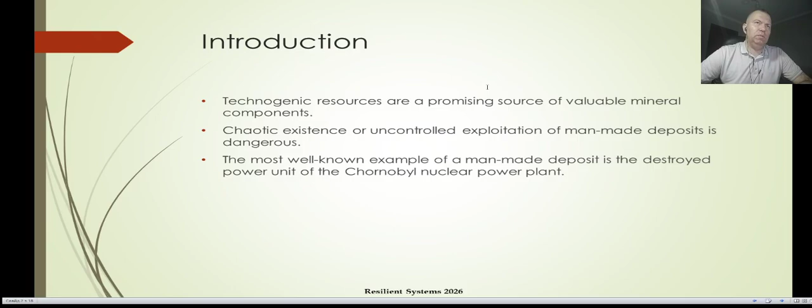At the same time, uncontrolled exploitation of man-made deposits and their chaotic existence turn industrial landfills into potential sources of environmental pollution due to the filtration of aggressive toxic substances into underlying rocks and mixing with groundwater. A well-known example of a site that can be considered a man-made deposit is the destroyed power unit of Chornobyl NPP. The most acceptable method of extracting the useful component is its infiltration leaching.

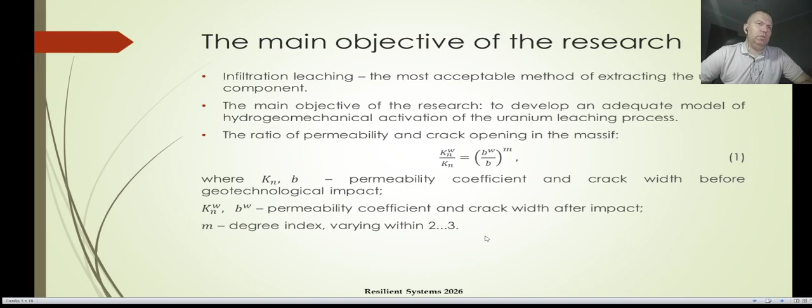The main objective of research is to develop an adequate mathematical model of hydrogeomechanical activation of the leaching process, allowing to optimize the reagent costs by choosing rational parameters of its infiltration, flow rate, and concentration. The main idea for the activation of physicochemical processes during leaching is based on the following ratio of permeability and crack opening in the massif. The next slide shows this relation in a graphical form, where there is a sharp quantitative jump between the parameters of permeability and crack widths.

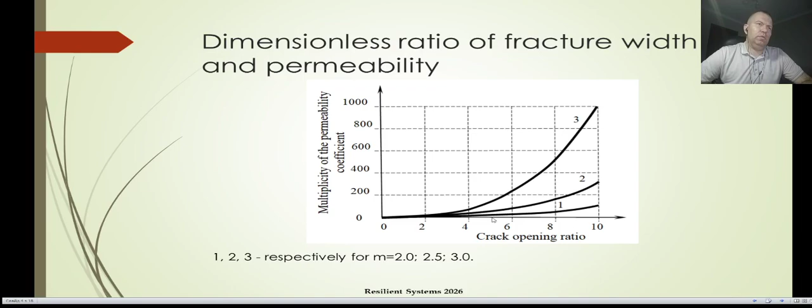One of the effective ways to combat the negative impacts of industrial waste accumulation on the environment is the construction of various types of protective anti-filtration structures. Our proposal is to create a protective anti-filtration collector complex AFC that provides protection of the subsoil from the penetration of toxic substances, collection and delivery to the surface for processing and disposal of liquid technogenic waste.

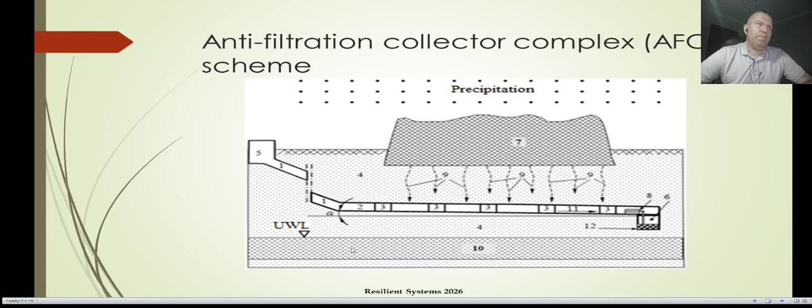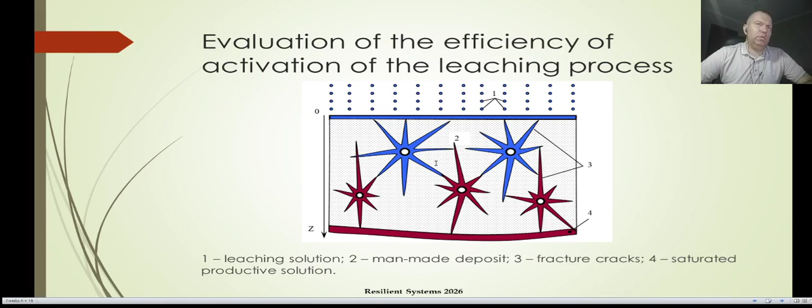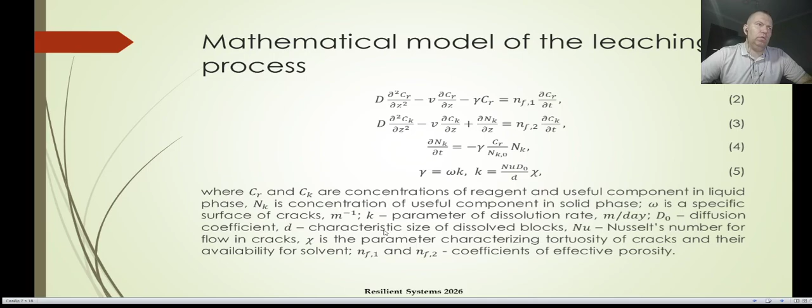The efficiency of hydrogeomechanical activation of the process of leaching was assessed by modeling one-dimensional vertical non-stationary migration of a two-component mixture leach solution and useful component, where 1 is leaching solution, 3 fracture cracks, 4 saturated productive solution. The mathematical model of the leaching process is a system of mass transfer equations 2-5 under the condition of non-equilibrium kinetics. This equation reflects the pattern of decreasing leaching rate in the technogenic massive in the vicinity of the crack surface. The experimentally confirmed dependence of the increase in mass transfer intensity on the filtration rate is taken into account. The initial and boundary conditions for the system 2-5 are formulated in the following form 6-9.

These conditions correspond to the equality of convective flows and insignificant diffusion of these substances flowing from the fractured rocks into the underlying deposits, which is acceptable at a high filtration rate. The system of equations 2-9 was solved by the finite difference method using the stable implicit scheme with the developed calculation program. The created software was developed with the .NET 8 framework and WPF that provides a simple user-friendly interface.

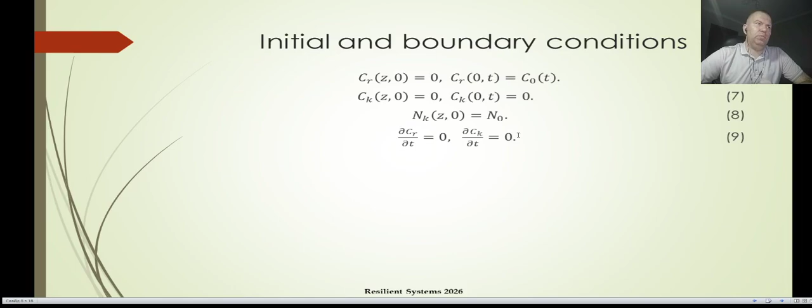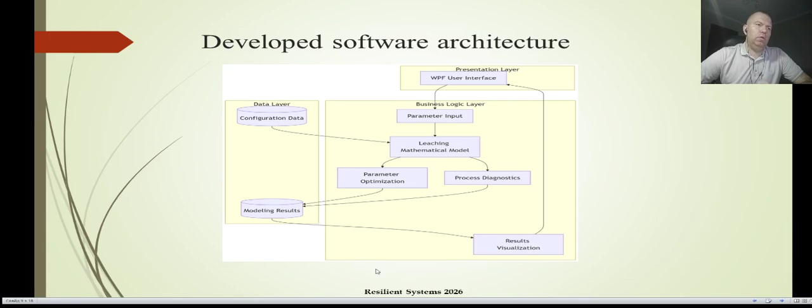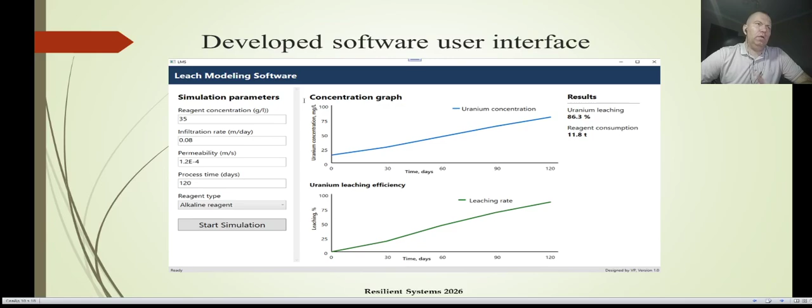The software system is organized according to a three-layer architecture comprising the presentation, business logic, and data layers. User interaction is performed through a WPF-based graphical interface, which provides parameter input and visualization of simulation results. Configuration data serve as input to the mathematical model, ensuring consistent execution of simulation, optimization, and diagnostic procedures.

The initial data for modeling and estimation of technological parameters were selected for the technogenic uranium deposit at the Chornobyl NPP site. In accordance with the proposed scheme of infiltration leaching, the main part of the useful component is expected to be extracted within 3-5 years. During this period of time, according to the experience of developing uranium deposits with a low U content in the rock, at least 80% of uranium passes into solution from the solid phase.

The filtration rate in fuel-containing masses depends on their permeability and the flow rate of the supplied reagent. In the adopted leaching scheme, it corresponds to the flow rate of gravitational water supplied by hydraulic monitors to the surface of the fuel-containing masses, which occurs at a gradient close to unity.

Before hydraulic fracturing, the filtration rate cannot exceed 0.1 meters per day. After hydraulic fracturing, the rock filtration coefficient increases, resulting in a filtration rate in the range of 0.3–0.6 meters per day.

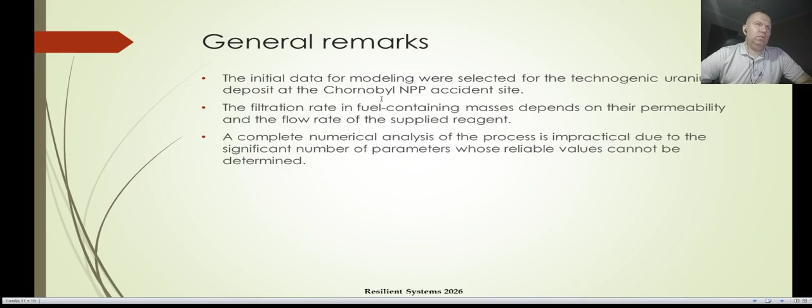A complete numerical analysis of the process is impractical due to the significant number of parameters whose reliable values cannot be determined. Therefore, the purpose of the modeling was to obtain numerical estimates of the main leaching characteristics in the range of known values of the process parameters for the development of this deposit. The modeling results are presented on the next slides.

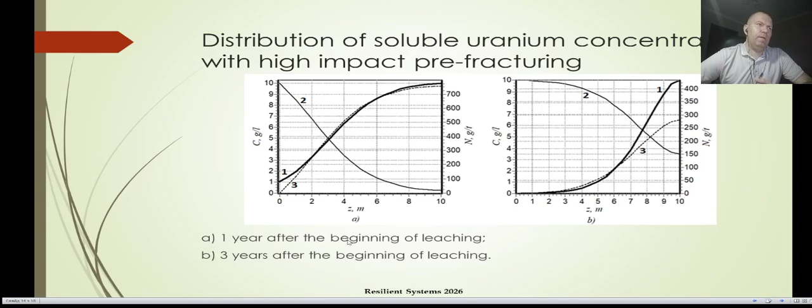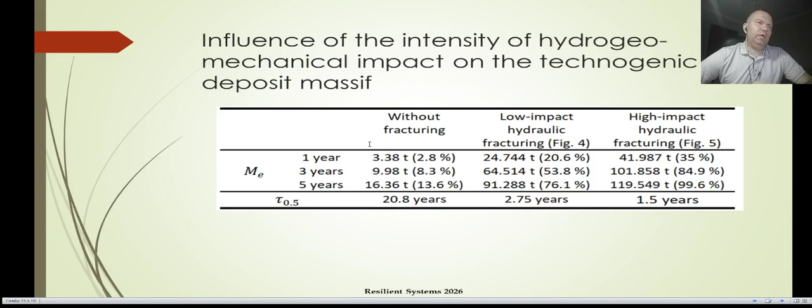So, during the research, it was established that when hydraulic fracturing affects rocks of a man-made deposit, there is a sudden increase in the rate of leaching of the useful component due to an increase in the permeability of rocks and the area of their contact with the reagent, which allows optimizing reagent costs by choosing rational parameters of its filtration flow rate and concentration.

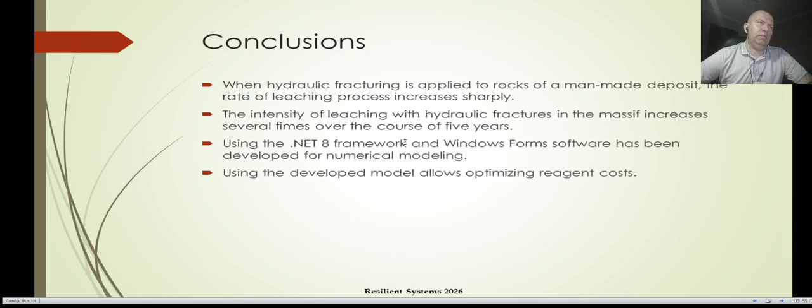The intensity of leaching with hydraulic fractures in the massif increases several times over 5 years compared to the massif without hydrogeomechanical activation. Using the developed model allows optimizing reagent costs by choosing rational parameters of its filtration flow rate and concentration. Thank you for your attention.